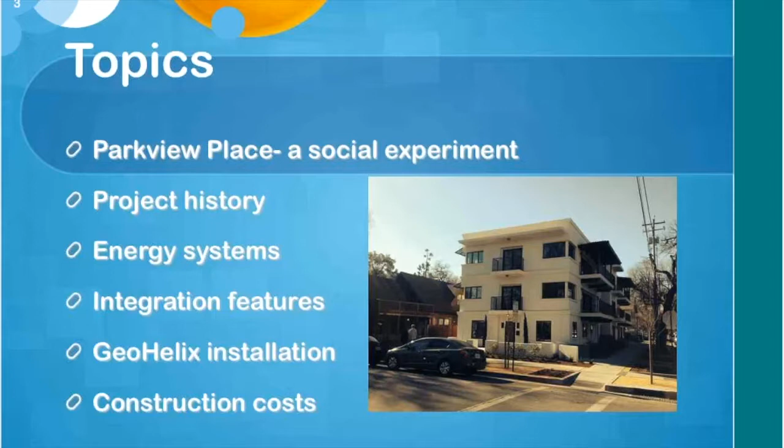A little bit about the GeoHelix installation, and then I'm going to talk about costs and cost effectiveness, because I think it's possible to build a very cost-effective building. I should be pointing at that, I guess, huh? Anyway, to begin with, it's been a senior social experiment.

This house was the Pena house in the city of Davis. Narcissa Pena was the last of the Penas living in Northern California, at least in the Davis area. If you've ever driven I-80 from San Francisco to Sacramento, you go by the Pena Adobe. It's a historic spot near Vacaville. That's the family that was so crucial in developing and occupying and farming a lot of Northern California, or at least this stretch. They had a Davis component.

The last of the Penas, Narcissa Pena, lived in this house her whole life in downtown Davis, corner of 4th and D, and she died in 2008. The property came up for sale, and the question was, is there historic value here? Should this become a museum? Well, the house had no foundations, and it couldn't be saved, but conventional developers stayed away from it. And so we, with our group, were able to buy it, which we probably wouldn't have been able to if it had been an empty lot.

And we spent a long time deciding how we were going to do this project, how to organize. We became a community apartment project because that organizational mode is one of those that allows you to carry your former property tax valuation forward so that you don't get zapped with the full price of the new place you're building. It took us 4.5 years to actually get the building built, and 3 of the 4 couples moved in before the end of 2013. We make all our decisions by consensus, which is a very interesting process, but I won't say more about that now. We don't have the time.

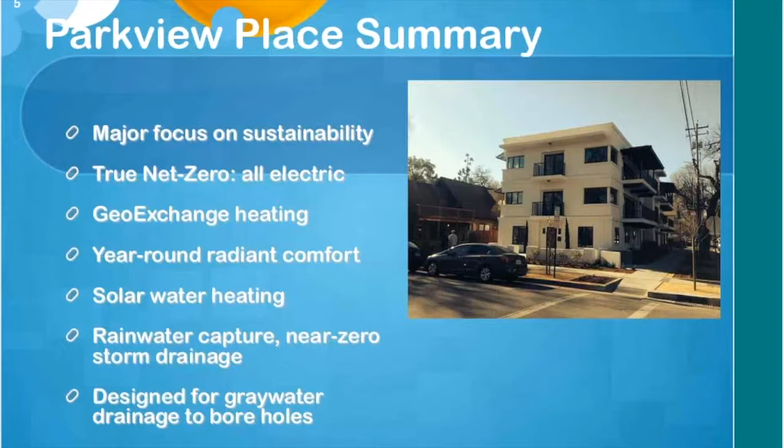We have active solar water heating. We have an 11,000-gallon rainwater tank under the building, and we designed to be able to use the gray water to improve the performance of the geosystem in the boreholes. Well, we don't have that yet, but that's another story I better not tell. We had this fancy chart made that shows all the systems in the building, and if you come up here really close, you still can't read the writing there.

But I just want to show that we have these various circles defining the different systems in the building, and the biggest one is the building itself. So we really focused on passive solar design of the building and on radiant heating and cooling. There's no forced air; all the heating and cooling in the building is from the floors. It's a very high quality building. It's a luxury building, really, with very classy tile floors. We built the building for $180 a square foot, though.

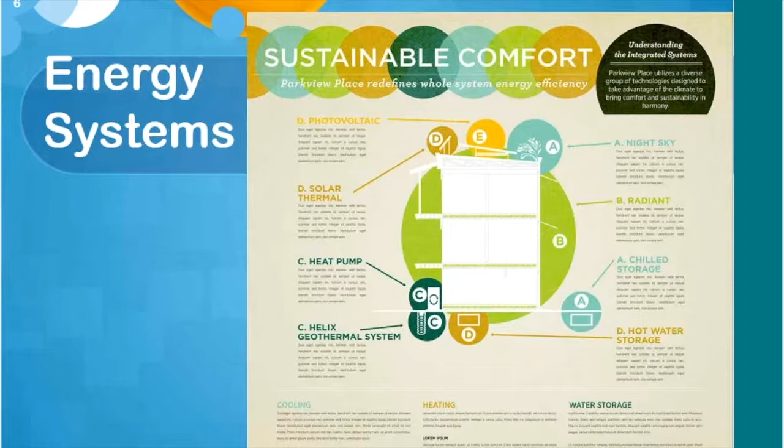And the other circle that I want to point to here is the geo system, which basically powers the heating and cooling of the building through the radiant floors. So that's enough about those circles. We have 7,600 square feet of occupied space in the building. This is the mechanical room. It's about the size of the furnace in a normal home. If you put together the furnace and the condensing unit in a normal home, our equipment occupies less space, and we're serving 5 apartments.

We have the 4 owner-occupied apartments, and then we have a rental apartment on the first floor, which probably will house our caregiver within not too many years. But the geo-exchange system: we have 14 working GeoHelix boreholes. They're 24-inch diameter, 22-foot deep. Inside each of those, there's a spiral with half-inch HDPE tubing on about 6-inch spacing all the way down to the bottom.

We have 2 40 kBtu, just under 7 tons, water-to-water heat pumps stacked. There are 2 units there. You're seeing one on top of the other. We don't have desuperheaters in them. We use the upper heat pump as our auxiliary water heating source, and each of the apartments has two thermostatically controlled zones in it.

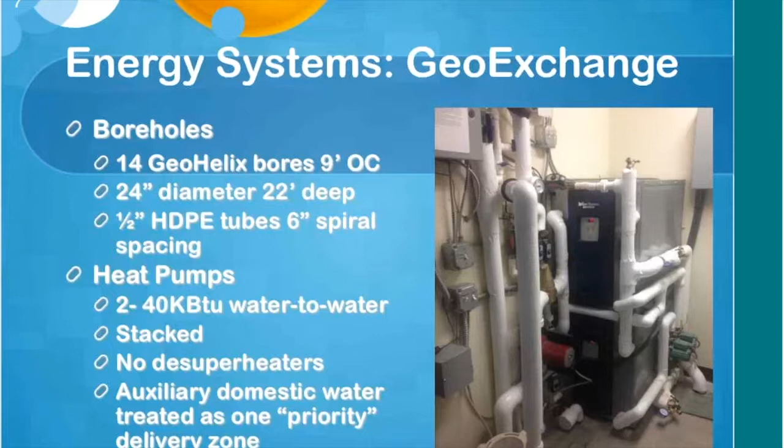The water heating is just like another zone, but it can operate in heating mode all year. And so that's the Geo system.

And we had many struggles getting through the planning process with this building, despite the fact that it should be just what downtown urban areas are looking for today. But we did get through it.

And there's only 75 square feet of solar thermal, but from early February through almost the end of November, we have all the hot water we need from those panels. And then we just have to supplement with the heat pump.

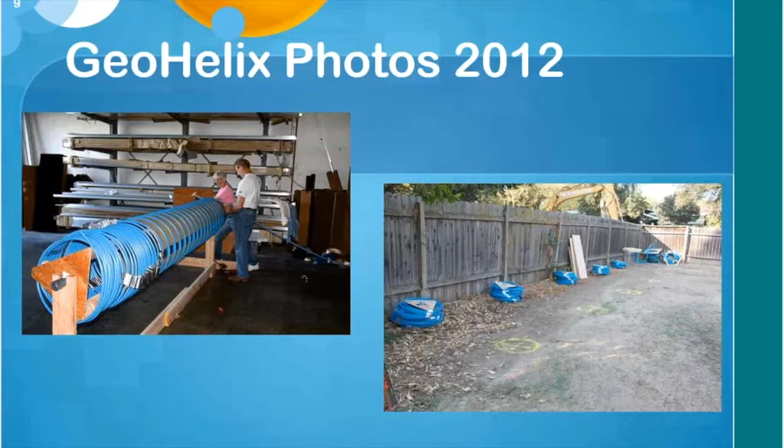And you can see these bullseyes are where the drill's going to hit. The auger's going to hit there and drill the holes. And these are the completed Geo Helixes ready to go into the hole. And then here are 3 shots showing we've put the first row along the south side of the building. They were within 5 feet of the neighbor's fence.

And here's the auger that drilled those. In the second phase, this was just a backhoe type rig that could put an auger on it. He had a bucket on the front, 24-inch auger here, which went down 13 feet before lunch for all the holes. And then after lunch, he put this 18-inch section on top, which is just a spacer, and allowed him to take the 24-inch auger all the way down to the bottom.

Here's the support rig. These are the original design that we developed at Davis Energy Group, which is a suspender design. I'll show you a little bit more of that in the second half of the presentation. And so that's supporting it for backfill, and then the suspenders are taken loose after the sand fill is completed. And these are just some of the connecting tubes from bores that have already been completed down the line. So that's the suspender design.

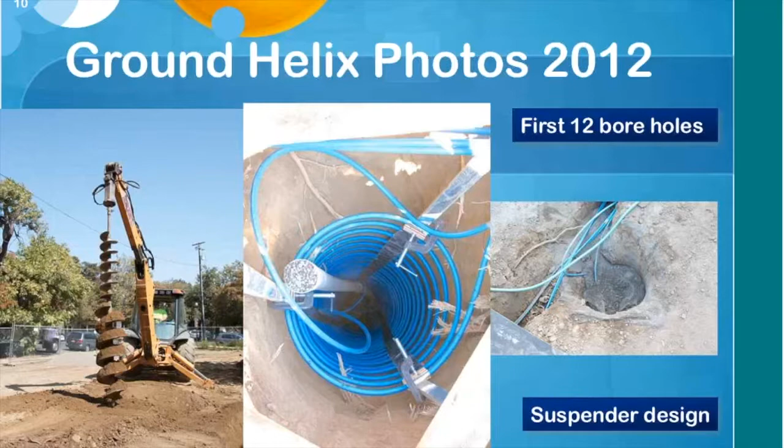The last 4 coils, which we put along the east side, were done later after the slab for the building was in place. And we had a driller come out from Sacramento who had a much bigger rig that could go, he could auger a 40-foot deep hole with this thing.

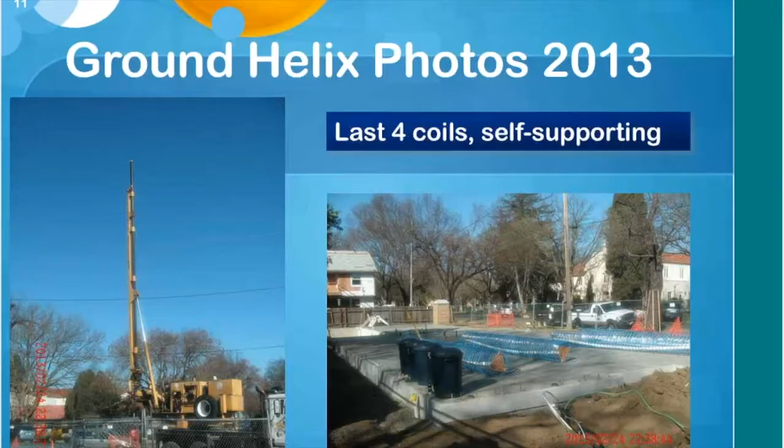And here, by this time we had gone to the pre-stretched design that we expect to market. So you can see these guys are all, there's 3 of them here anyway. I guess 1 is already in the hole at this point. But these are stretched out, and they'll go in the hole next. And I'll show you a little bit more about that in the second part of the presentation here.

But basically, this is just the first winter. We moved into the building in December, and the building was cold when we started, and it was a pretty cold month. And we had the loops filled with water, and we had inlet water coming in at 55 at the start, and dropped to 45, and the outlet from the heat pumps dropped to 32. And during that time, we were operating still with a COP that was pretty well up there.

But by January, it was cold and dry, and not having the ground wet, we had hoped that we would be souping these up a little bit with gray water, and we weren't allowed to put our gray water into the ground.

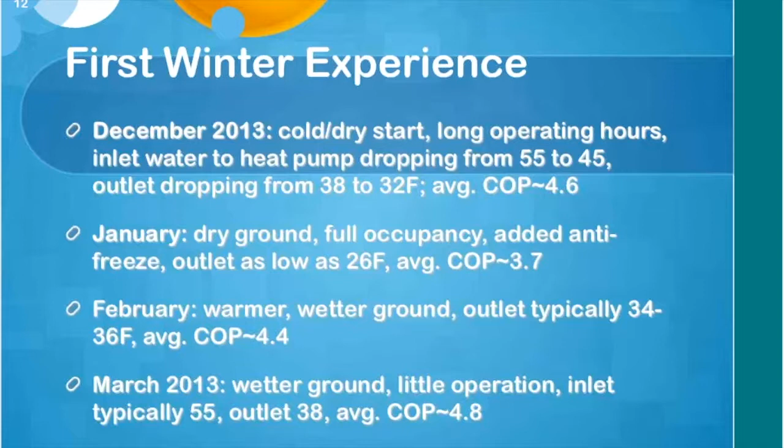So I had us add antifreeze to the system, and outlet temperature from the heat pump fell to 26 degrees, and consequently the COP fell, but still that's a pretty high COP. By February, it was coming up again, and by March, we were back up almost to a COP of 5. So very, very efficient operation.

Since that time, we've been through the first full summer of cooling, and we operated the system pre-peak. We never operated the heat pumps in the utility on-peak period during last summer. And we just pre-cooled. We have 2-inch toppings, so it's wood frame construction, but we have our tubing in 2-inch gypcrete topping on the floors, and we would cool the apartments to 74. On the hottest days, they'd coast up to 78 by 7 p.m., and then the heat pump was allowed to

operate again. So real comfort. The cool floor is really, really valuable for comfort, just as in the winter, the warm floor is really wonderful. This past winter was the driest on record. There was almost no water flowing into the boreholes. Our drain water from the roof goes into the boreholes as well, by the way, after it fills the rainwater tank. And the coolest return water going in that I saw was 33. So we really didn't need the antifreeze that is still in there.

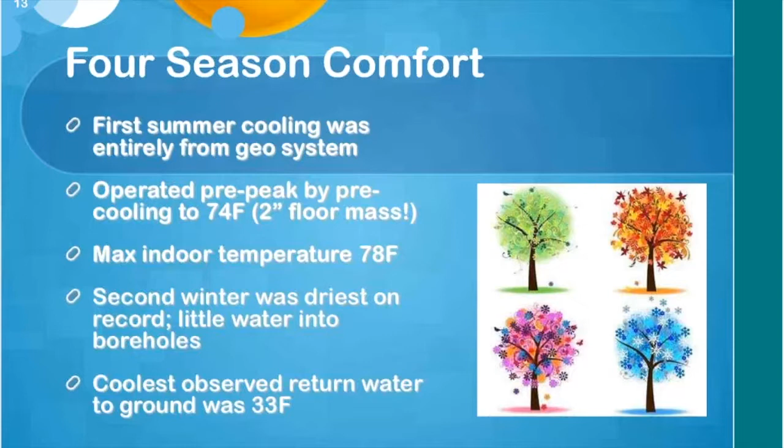Installed costs. Our installed costs were actually lower than this because there was some sweat equity involved. So what I did was to take our costs and I added a 20% margin extra for labor, and then another 20% for a contractor margin. We used high density polyethylene instead of PEX for our floor tubing because the heat pumps are never going to get the water hot enough to exceed the rating on the HDPE. Half-inch HDPE you can buy in quantity for under 15 cents a lineal foot.

So we got our full radiant system, including the heat pumps, circulating pumps on both sides, and manifolds with tubing on 6-inch centers in for under $3 a square foot. We got it in for a lot less than that, by the way, because we actually got the tax credit applied for the ground loops and the radiant together. Our ground loops we got in for $1.12 a square foot, and our PV, I didn't leave the credit in that we actually took because it's no longer available on these. Hopefully it'll come back, but there was a Federal Recovery Act credit that applied to geo through 2013 or 14, I can't remember which. But I left the credit in because it's still there for PV.

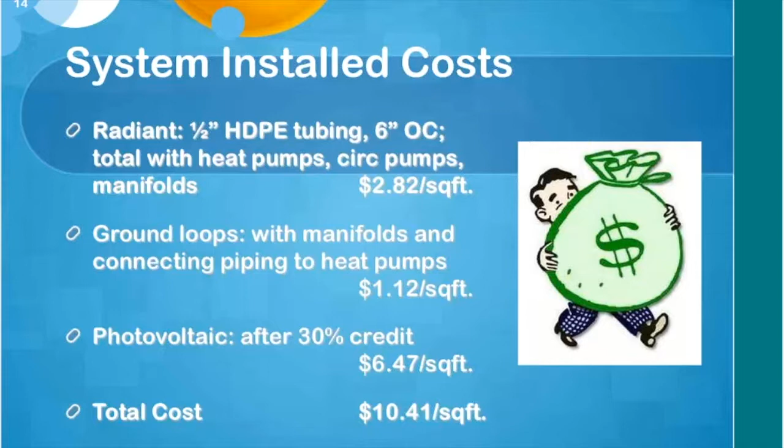So we paid $6.47 a square foot for our photovoltaic. Our total cost for these components was $10.41. I conservatively estimated in this cost chart that the conventional HVAC system would have been $4 a square foot. And this is how we came out. We generated 27,500 kilowatt hours from our PV system. We used in the building less than 23,000. We had a surplus of 4,600, which we kindly sold back to PG&E for 4.5 cents a kilowatt hour.

But it's reducing our meter charges for the 7 meters that were forced on us. And so based on Title 24, our annual energy cost for the building would have been about 4,800. I took a 15 cent per kWh value for the credit for the excess PV.

Can I go back? So anyway, the bottom line is that we not only came out significantly net positive in our first year, but we have a payback that shows to be about 8.8 years, and that leaves out a lot of things. It didn't show any credit for not having to run any gas into the building at all. It doesn't show anything for the increased value of the building for having these features. The thing that's a little silly about all the simple payback calculations that we do with buildings is that we neglect to consider the increase in value for the features that are being considered. We want them to go to zero value at a certain time as though they don't allow us to sell the property for a higher price because of their benefits.

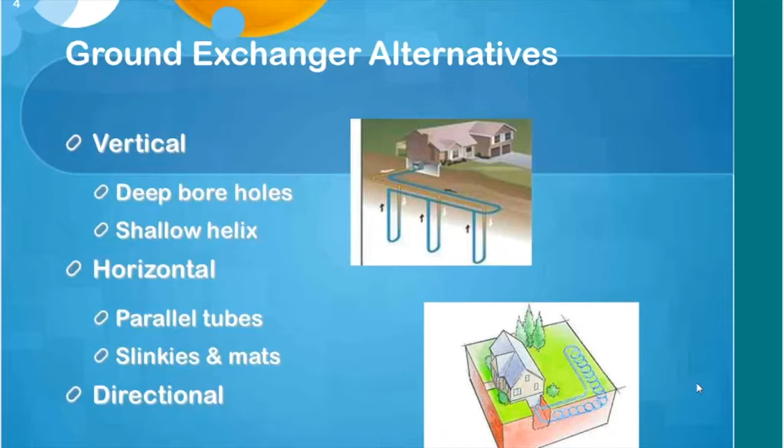There's the deep bore vertical technology that's commonly used and particularly valuable where there isn't so much land area. You take advantage of deep earth instead of surface earth, and there are differences in performance there. And then the lower picture here shows the slinky approach that's like what Bill did at his house, where you have the land available to do that. And then the directional drilling approach that Bruce mentioned and showed a little bit about with, I think Ditch Witch developed that technology originally. So those are the traditional alternatives.

And GeoHelix is a little bit different. It was actually pioneered, the first version of it that I saw was done by a fellow named Larry Marchiniak in the Sacramento area, and he built these rebar cages and wired HDPE tubing around them and sunk them into augered holes. Pretty laborious, but they work pretty well. Meanwhile, Davis Energy Group developed this suspender helix in the course of a major project that we had, and I think that might be where I met Paul originally. I'm not sure, but it goes back 16 years or so.

And we did a couple of projects with that, but the second one, we did a total of 36 boreholes, and I'm calling that GeoHelix 1. It was the suspender design. It was used on a major multifamily project on the UC Davis campus, but right early on when the auger went into the ground, it hit an underground stream bed. And one of the constraints is you have to have soil that'll hold together so you can drill a hole of a given diameter and not have the sides just cave in on you. And that's what happened there. So that's pretty much when it went on the shelf.

By the way, just a funny note is that when I did a patent search recently, someone in Italy patented our suspender design that we had demonstrated and documented for the Energy Commission 8 years earlier, and it got a patent in Italy. So good for them.

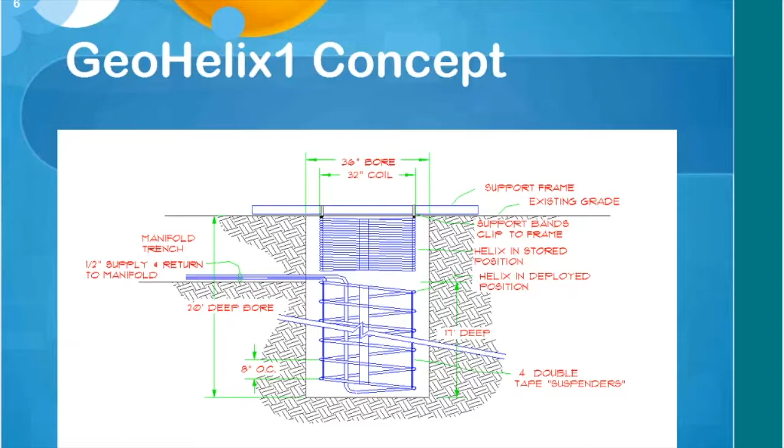So the second concept that we're using now, which we feel is really marketable, assembles them the same way, but it includes some clips at the top and about every 4 feet along the sides of the spiral that a 20-foot long half-inch PVC tube fits into and stretches the thing to full length before you put it in the hole. And then when you drop it into the hole, it hits bottom. And as long as you're backfilling through a section of chain link fence or some suitable screen so that you don't have big chunks falling on it, then you can backfill, and sand is best because it compacts so quickly. But as long as you have that grate on top, you won't damage the helix.

And so these are very similar dimensional characteristics, except that those GeoHelix ones were in 3-foot diameter holes. We sharpened our pencils a little and figured out that the 2-foot diameter hole is a lot more economical in terms of drilling them and filling them, and probably the difference in the amount of earth that you capture in the middle of the cylinder is not so great. You're mostly trying to make contact with the further away ground. So I think that was a good decision on our part.

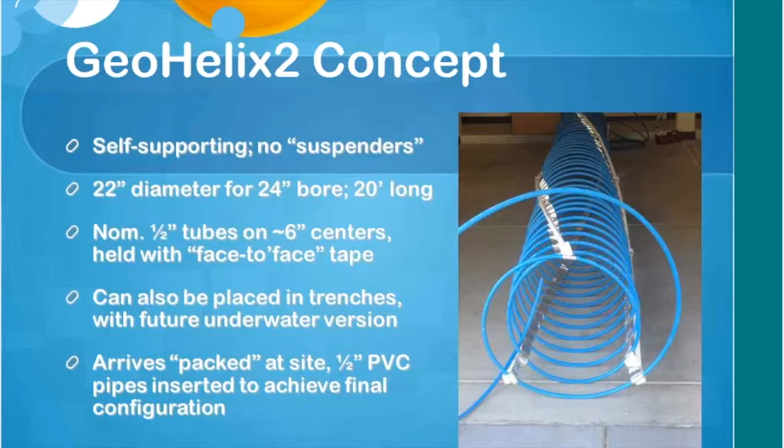It's a problem with conventional vertical bores, by the way, because you may go 200 foot deep, but in the top 50 feet, you have your down tube and your up tube within a few inches of each other, and you're transferring heat directly from one to the other, and it's self-defeating. So what you'd like to do is have the water proceed continuously through the tube in a way that it's not in very close contact with the down tube. That's just from the thermal standpoint.

Also, I'll get into some of this in pros and cons, and I better watch the time. The application range, the most important thing limiting us is that you have to have soil that can be augered. So if you're in rock or big gravel, forget it. I guess I should just say that the characteristics of the geohelix are somewhere between the horizontal and the deep bore.

The deep bore has the advantage that you're getting down usually into the water table, and you're getting down there to deep earth where the temperatures presumably are more stable. But on the other hand, you don't have access to the recovery characteristic that the surface earth gives you. So if you're in a heating dominated or a cooling dominated situation instead of a balanced situation, there are data that show that over time you swing the clump of earth that you've captured in a direction, and it just keeps going, and you don't have the long-term annual ground temperature working for you anymore. If you're heating only, it's cooler, and so you're losing efficiency.

But compared to horizontal, you also capture more earth because you're basically taking advantage of the top 30 feet or so of the ground instead of the top 10 feet or so. But like the horizontals, you have the advantage of smaller excavation equipment. I don't think you rival the equipment advantage that you have, though, with directional drilling, where you can be out in the street effectively and go in. And if you don't have to be in the backyard too, that's a pretty neat option, and maybe it's as good or better an option for a retrofit.

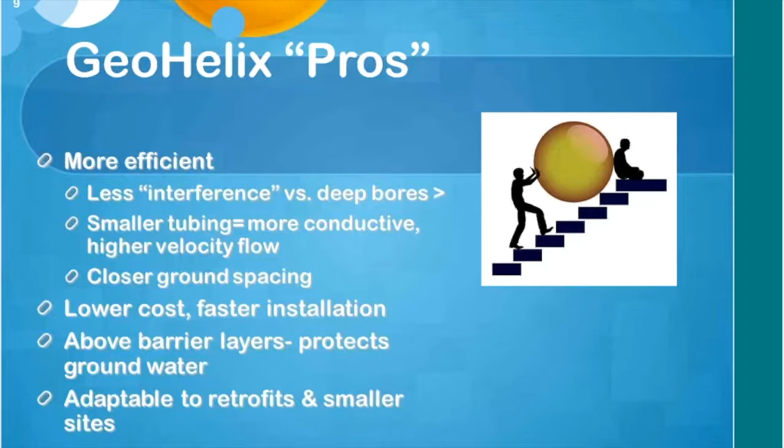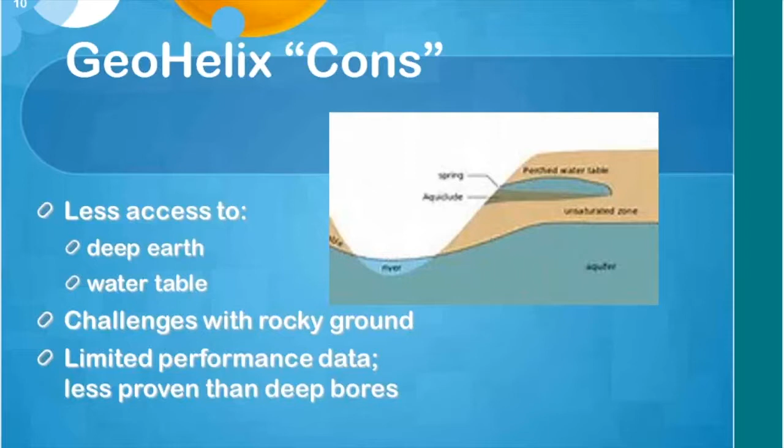The biggest con is really rocky ground, but also you have less access to the deep earth, which if it's a balanced load situation may be a loss. We do see lots of ways to get them wet, even though our dry weather lately has not contributed. But another major disadvantage for people considering using it now is it's new. We don't have a lot of performance data, but we're pretty confident based on our experience so far with our project and on the two completed projects from last time around that it performs well compared to the alternatives.

Rules of thumb: there was some fairly detailed testing done back in the 1999 era on GeoHelix 1, and the conclusion was that one 20-foot bore performed equivalently to 87 feet of deep bore. So we have a lot more pipe, of course, in contact with earth in our 20 feet. And so at this point, for projects that are coming to us now, just to be conservative, we're recommending 2.5 bores per ton. As I said, at our house, we have 2 bores per ton. It's working fine. We'd rather err on the side of conservatism and higher performance right now.

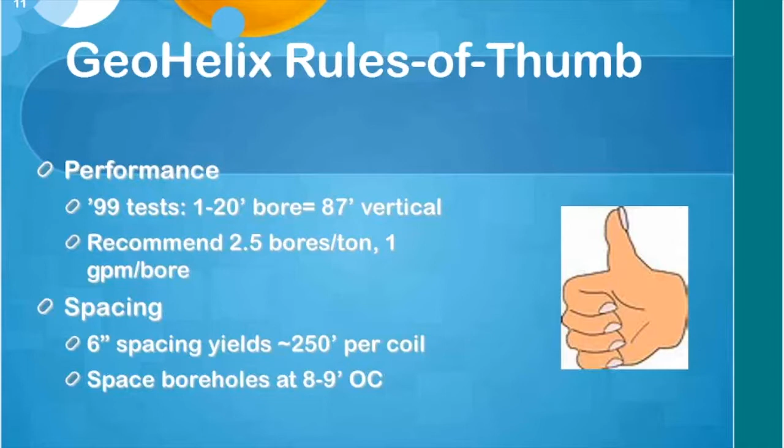Spacing: we've got about 250 feet of half-inch HDPE tube per coil, and we're recommending spacing the boreholes at 8 to 9 feet. Some of the synergies: keeping boreholes wet. If you can send storm drainage and gray water in there, that's going to improve performance.

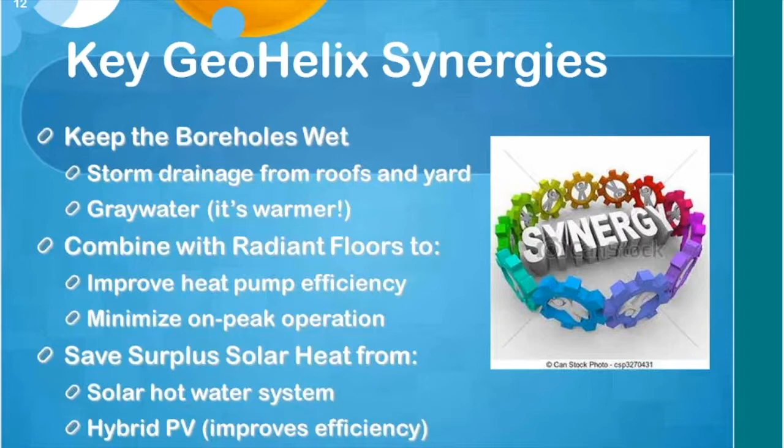One of our synergies is combination with radiant floors, but this is a synergy that's there for all geosystems. You have a smaller temperature range across the heat pump cycle if you are delivering through radiant tubing than you do through forced air, so you just get better efficiency that way. We have excess solar heat from our water heating much of the year, and we're able to discharge that into our borehole field. And since we're heating dominated, that's beneficial for us.

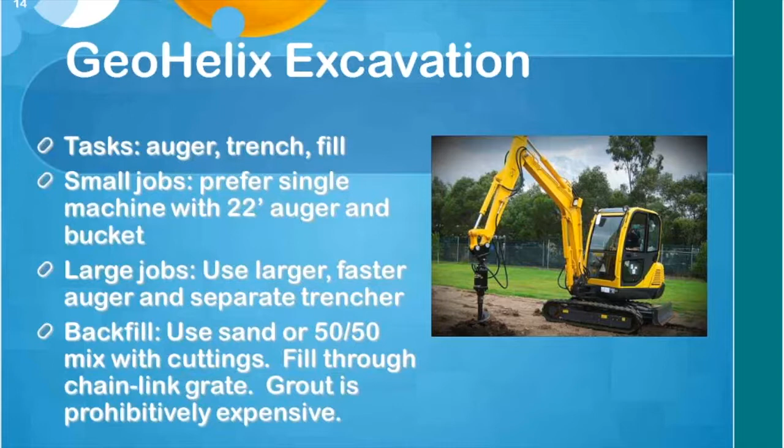Target cost per ton, I don't want to take more time, but I think these are pretty good costs for a near-term project where you've got 100 boreholes in a new tract home development. I think $700 a ton range is possible if you're taking a less conservative approach and putting in 2 boreholes per ton. Otherwise, if you do 2.5, you're a little bit more than that.

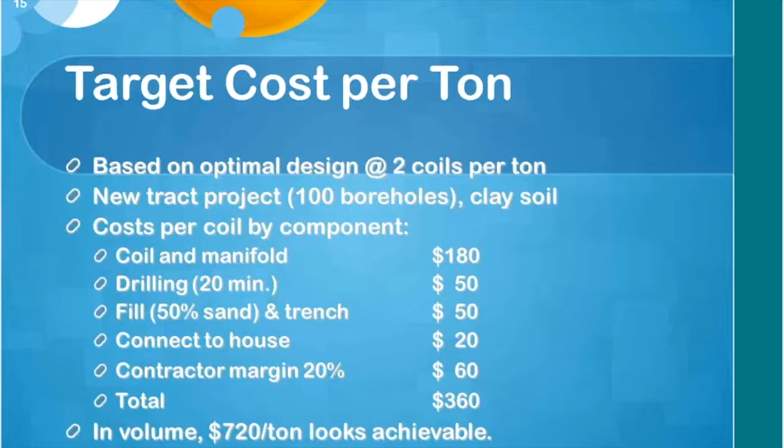So the status of the GeoHelix as a product: they're available now. They're in the field performing well. I'd say we're on a good learning curve. The economics are really promising, and I think it provides a really attractive way to get to cost-effective, true net zero energy in the relatively near future. So I'm happy to take questions if there's time.

Any questions, both online? Bill, let's take yours while we're checking online.

Could you describe the nature of the sand, if you would prefer specifications of your backfill? Any sand is good. The advantage of sand is there are multiple advantages actually. It's the least dangerous for damaging tubing in the backfill process. It's a wonderful filter. So in the face of any local agencies who are concerned about surface contaminants getting down through your borehole into the deeper earth, we're not going that deep, first of all, but second of all, the sand is a filter.

And it compacts quickly. So I think if you use just cuttings from the hole and make sure that you put them back in through a grate so that they don't damage the helix, what you're going to find typically is if you don't do something physical to compact it, within a year, you're probably going to have a foot-deep divot because there's going to be that much settlement. Whereas either sand or a good mix of sand and cuttings will give you very little long-term settlement in that borehole.

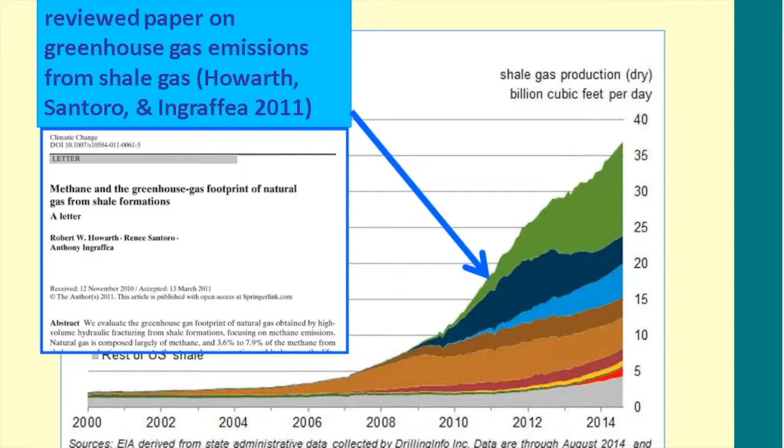Our building hasn't been finished long enough to speak to it much either, except that we are clearly heating dominated, and we've had higher ground temperatures this winter than we had in the first winter when we had that big early drawdown. So, time will tell.

Has this been used for cooling? Yes, we have used it for cooling. In all the projects that it's been installed in so far, which is 4, it's been used reversibly for heating and cooling. But the question is, what's the annual balance? And the monitoring probably hasn't been sophisticated enough to let us answer that.